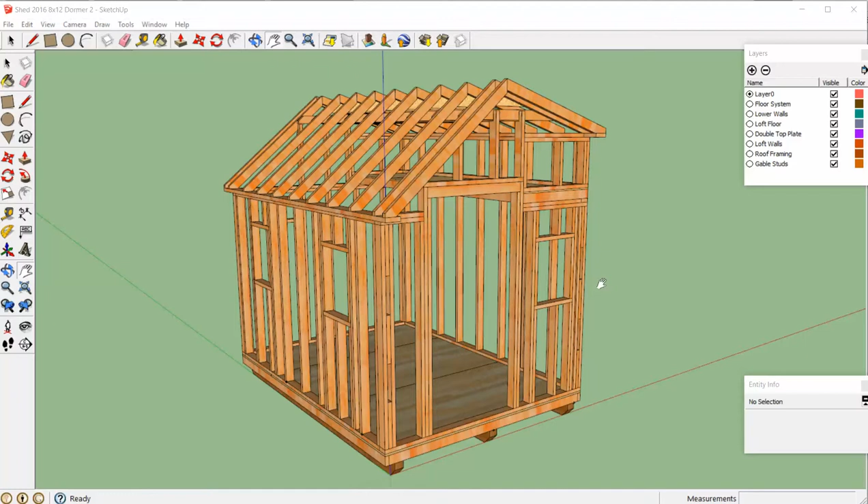Okay, we're going to start working on drawing our roof truss assemblies. I thought I'd give you a quick overview of what we're looking at. Essentially, we're looking to build a lot of identical assemblies. These are called trusses that we can begin to frame out our roof.

You can see how they sit onto the double top plate that you installed previously. And you can see now while we hang over 6 inches on the end, that gives us a nice little overhang on the front and back of our house.

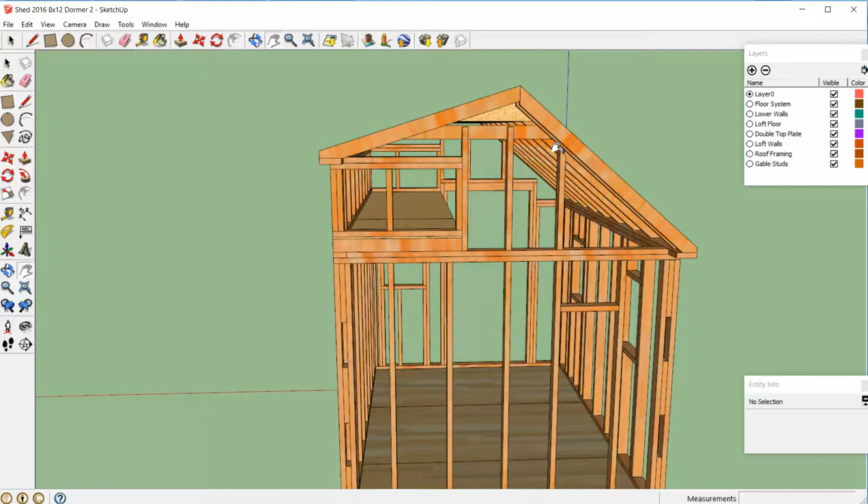The truss plan is drawn from the back so that we can see some of these truss pieces. Let's take a look at the pieces of trusses real quick, the names. The bottommost member is called the bottom chord. The angled rafter pieces, they'll call them top chords - I'll probably just call them long, short rafters. And then we're going to have some plates or gussets that help hold all the pieces together. So bottom chord, rafters, and gussets.

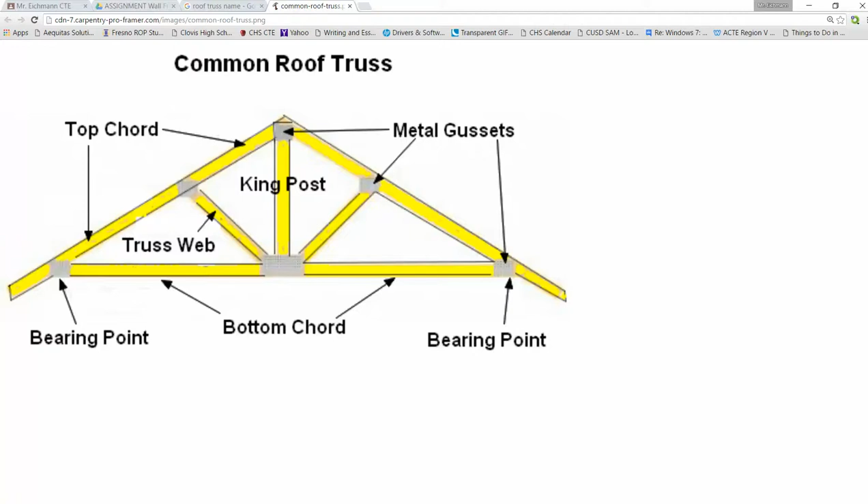Wanted to point out a few details on the truss assemblies you'll be building. They're almost all identical - almost all just like this one right here where we have the gusset, bottom chord, left, right, or short and long rafters. Those we have 1, 2, 3, 4, 5, 6, 7, 8 of those.

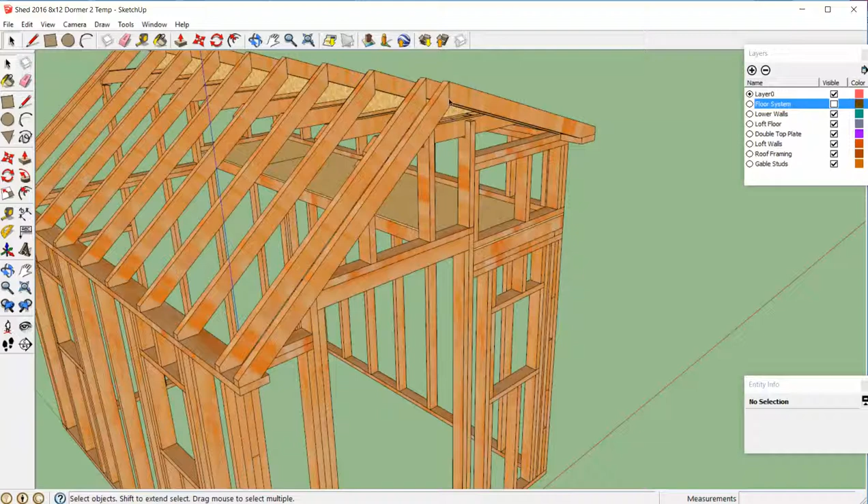We then have some very simplified stripped down versions out here on the ends that have no bottom chord and no gusset. These are called our fly rafters. And we have one final version - it's the only one like it in the whole building, and it has short rafter, long rafter, and just a bottom chord, but the bottom chord is on the opposite side, so that it doesn't interfere with the sheathing that will ultimately go on out here. So we have 3 different versions of this rafter, but they all use the same pieces.

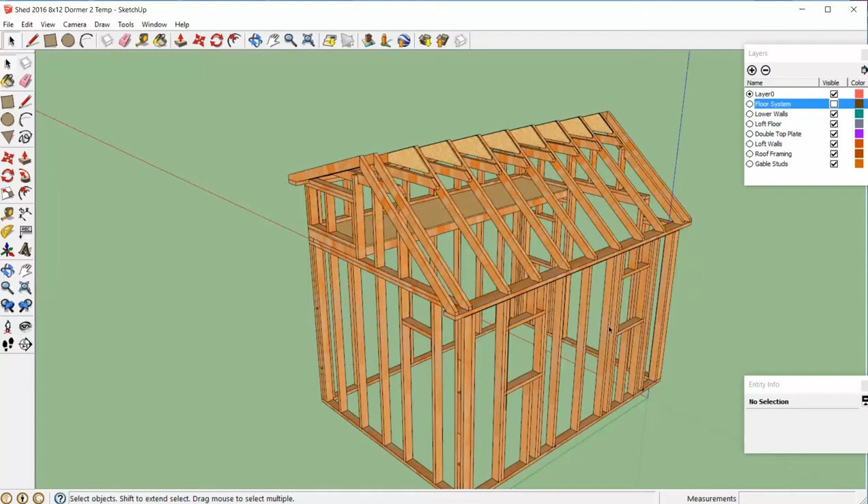So let's go ahead and get going on creating this. You should have your wall plan open that we created in the previous step with your loft walls. You should be right here at this step, in double top plate. Now we want to get up our building plans because what we're ultimately trying to do is recreate our truss just like this.

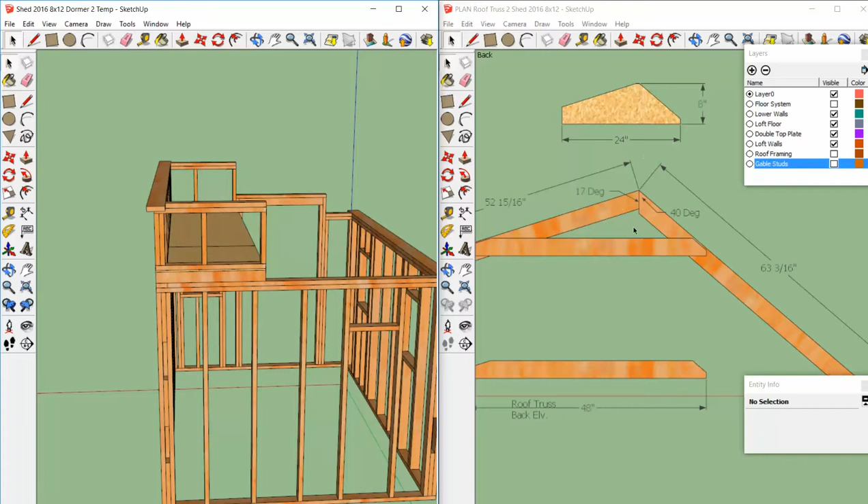Let me get the plans open. Okay, calling up the building plan. Why don't we get started? Why don't we start with this bottom chord? We won't worry about the angles - let's just worry about the overall 48-inch length of 2x4.

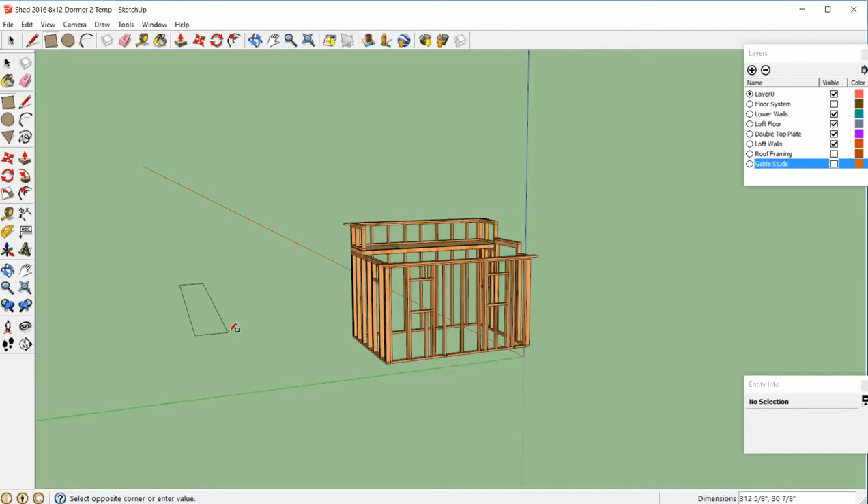So from our drawing, we want to create a 2x4, R for rectangle, on edge preferably. 1.5, comma 3.5. And we're going to pull that thing out 48 inches. There we go. Let's triple click in.

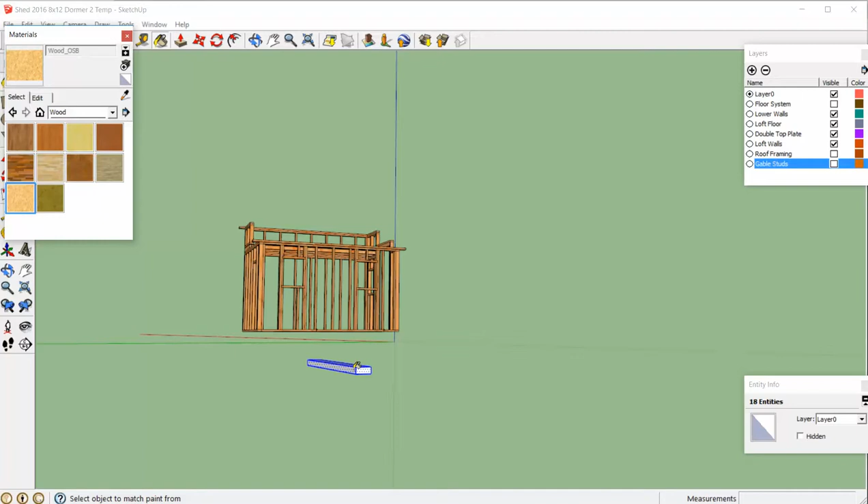And I'm going to brush, B for brush, and I'm going to give it a nice wood color. Material, wood, and here we go. Alright, and then I'm going to go ahead and make it - triple click in - make it a component. I'm going to call it bottom chord.

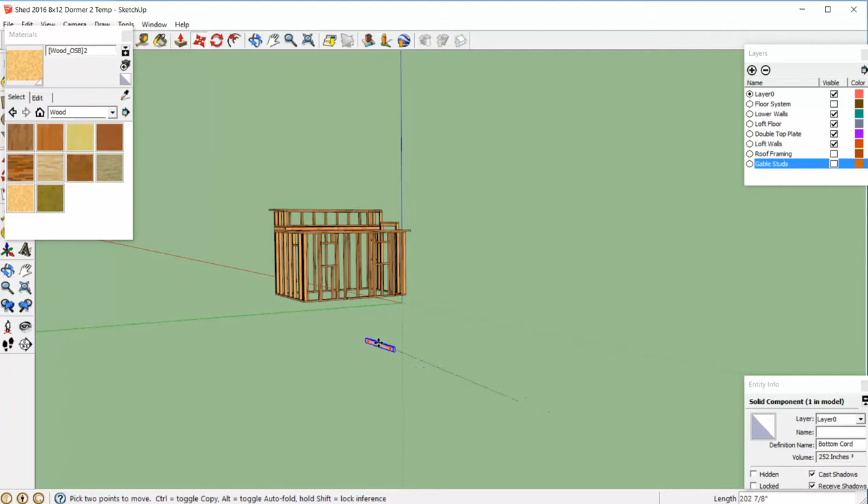Now I need to rotate that thing. Q for rotate, and let's get it up on edge. There we go. And let's move it over a little bit closer to our house. Here we go. Okay, we have our bottom chord now.

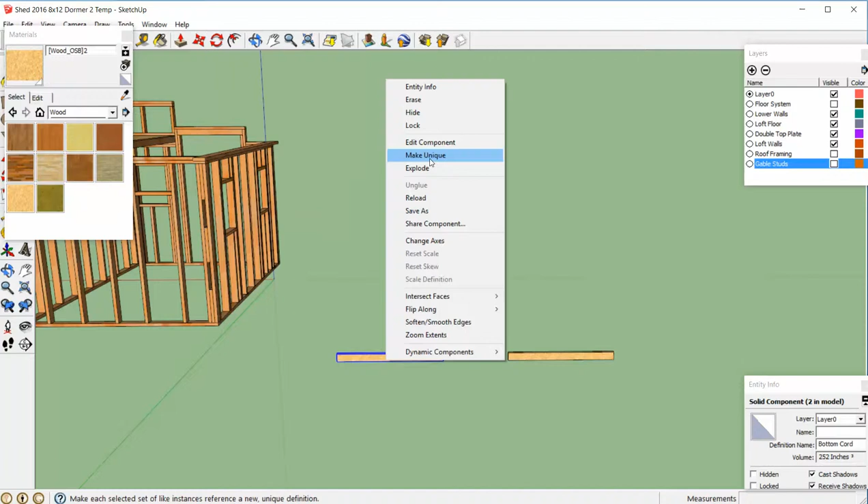Alright, back to the plan. On the plan, then we have a short rafter and a long rafter. Let's just get some wood to work with on that. Back to the drawing. I'm going to just duplicate this, M for move, press and release control, and I've made a copy. Now I'm going to make it unique, and I need to make it a little bit bigger. Push, pull.

I want to do the same thing for my other side. I'm just making some material here. M for move, press and release control to make a copy. I'm going to make it unique. And I'm going to push, pull, give me some more room to work with here. There we go. Let's go back to our plan now.

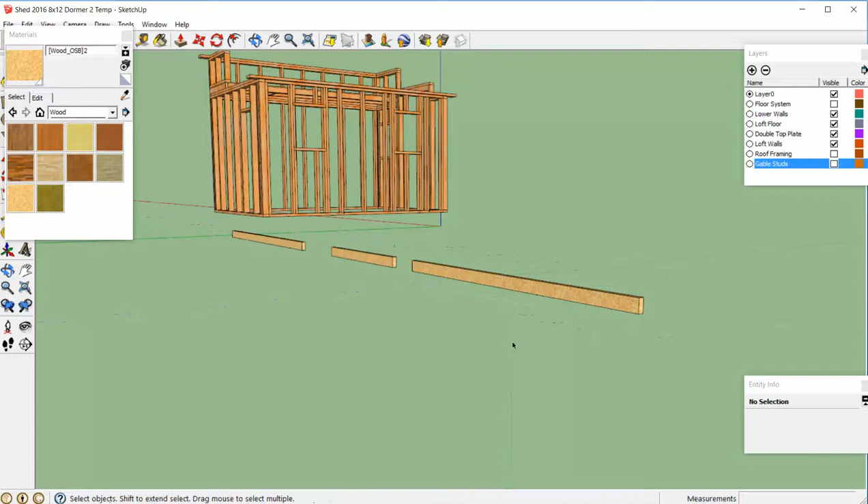Now on our plan, we see that these need to be cut at 17 degrees. On our plan, we can see that our long rafter has a 40-degree cut, and our short rafter has a 17-degree cut. We can also think of that as this is up 40 degrees from 0 and this is up 17. So let's go back to our drawing, and on the long rafter, let's select it.

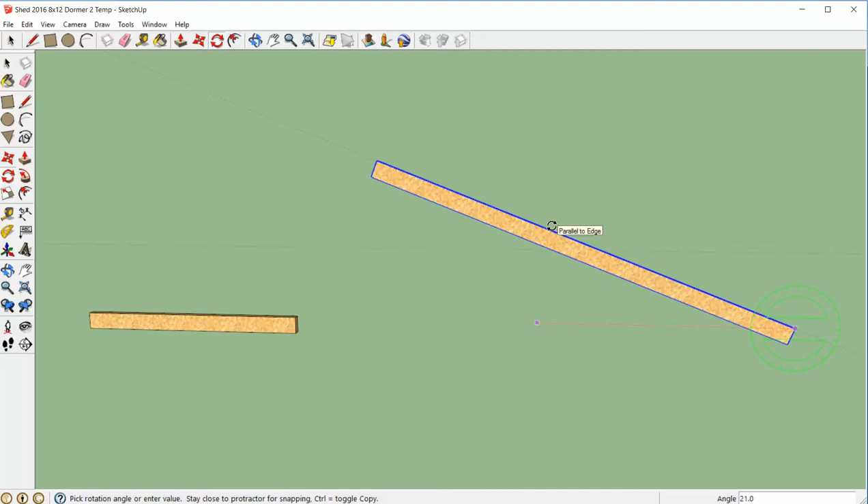Then let's press Q, which is rotate. Click on a corner, it has to be on a corner. Stretch out your rotation and click again. Now I can rotate this, and notice in the angle window down to the bottom right, I can actually specify an angle. I'm going to go with 40 on this one, 40 degrees.

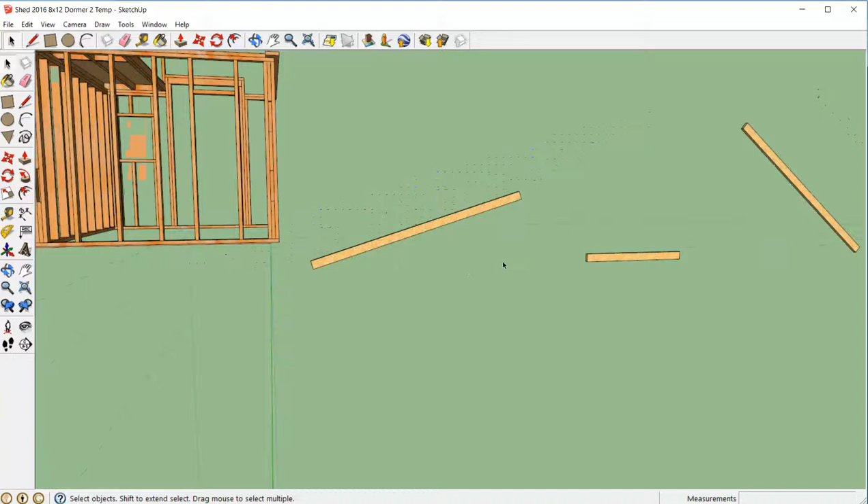And on this one, I'm going to grab the end. Q is the rotate tool, which is also over here in the toolbar. This is rotate, or protractor. Quick key for that is Q. And I'm going to bring it up 17 degrees. There we go. Now if I marry these two together, M for move, grab a corner, and let's put those together. There we go.

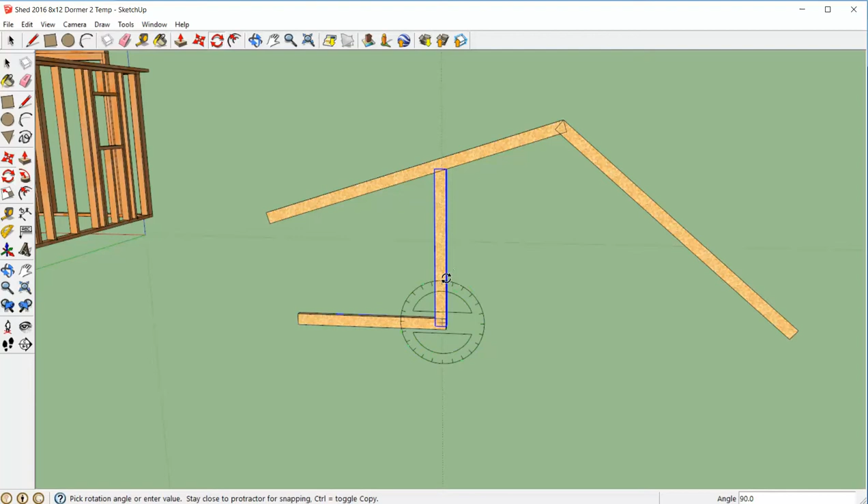We're going to start getting our angles chopped in. I'm going to go ahead and make a tool real quick for myself by selecting here, Q for rotate, and I'll make a copy of it. I need something that's straight up and down, that's all. M for move. There we go, I got something straight up and down.

Now I'm going to drill in, triple click in until I see the dots on the face of this board. I'm going to hit L for line, and I'm going to follow that down, straight down, and I'm going to push that away. Triple click in, and I'm going to push this excess away.

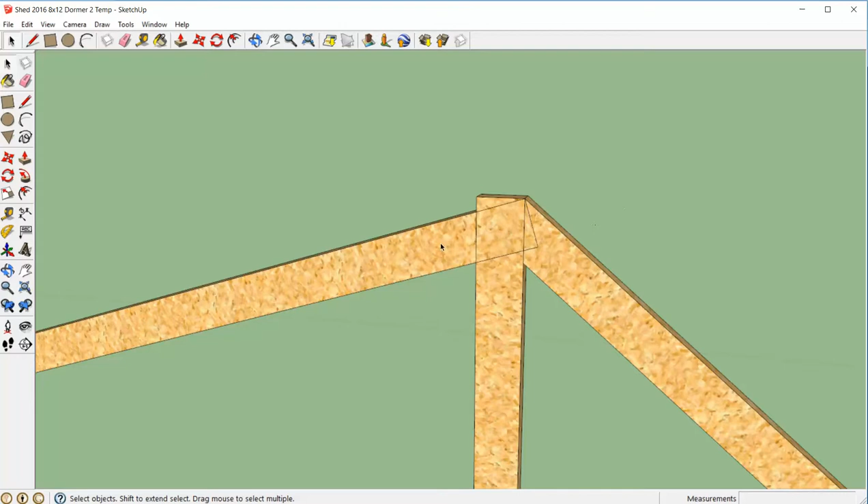Gone. Now I'm going to drill into this short rafter, left side. Triple click in until I see the dots. L for line, and take it to the bottom. And now I can P for push that excess away. Now when I take my tool out of there, my plumb tool, and I look at my rafters, I've made the end cuts that I needed.

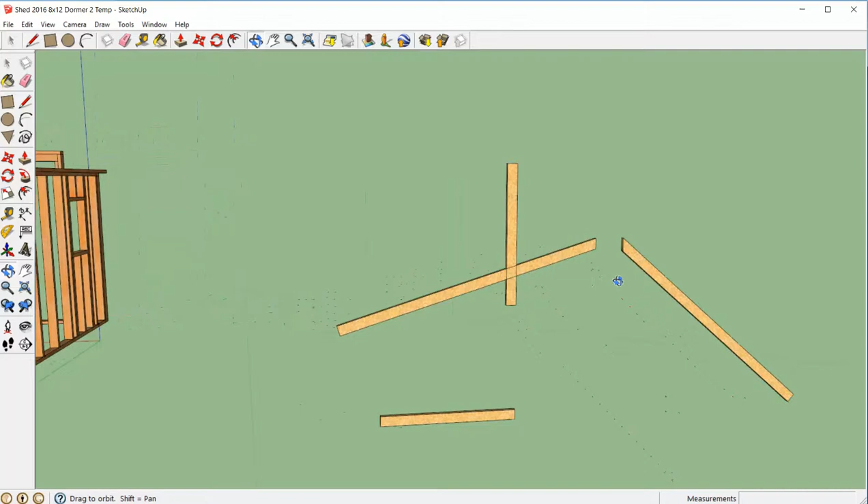Here we go. Let's put those back together. M for move. Excellent. Let's take a look back at our plans.

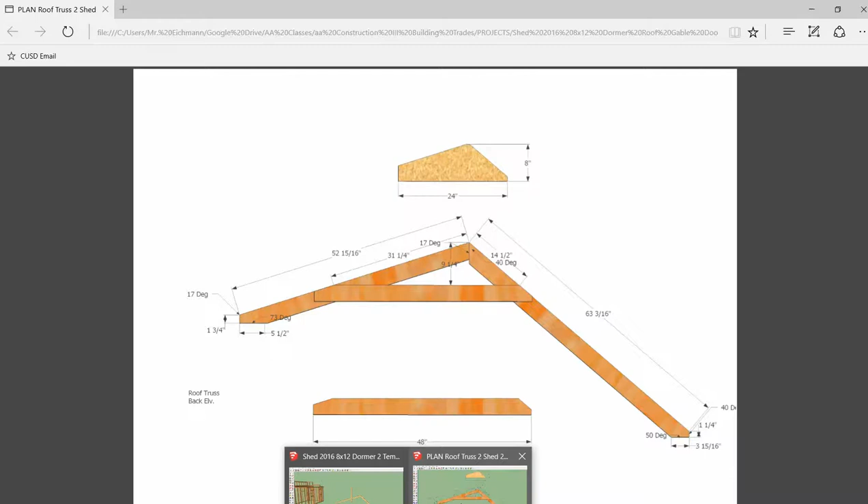Okay, I made a quick change here to the plan because we're going to need some more dimensions, specifically that this bottom chord is 9¼ inches down from the peak. So let's go ahead and place that now. Let me close this one. Alright, bottom chord 9¼ inches from the peak.

Take this, let's space bar, M for move, 9.25. Alright, now we just need to slide it into position, M for move, somewhere in here. Another dimension that we need from the plan is right here, 14.5 down onto this long truss, long rafter here. So let's mark that out.

T for tape. 14.5. There we go. Excellent. Very good. We can get rid of our little tool here. Actually, I think we'll want that for later.

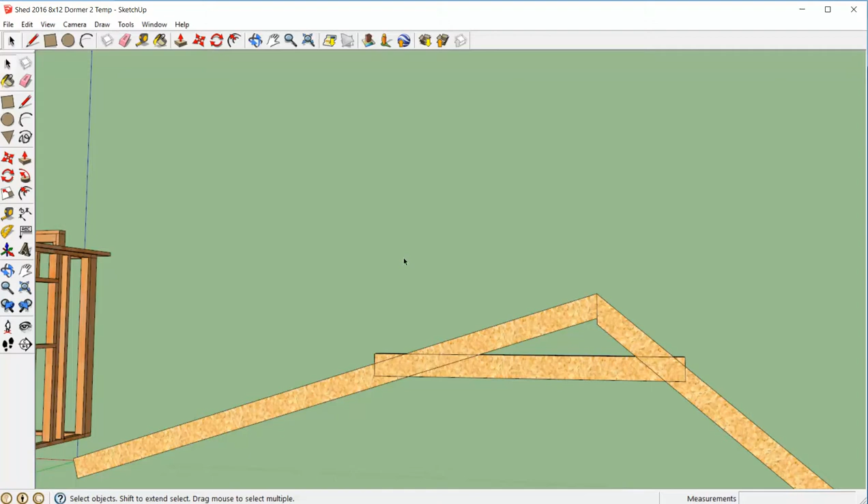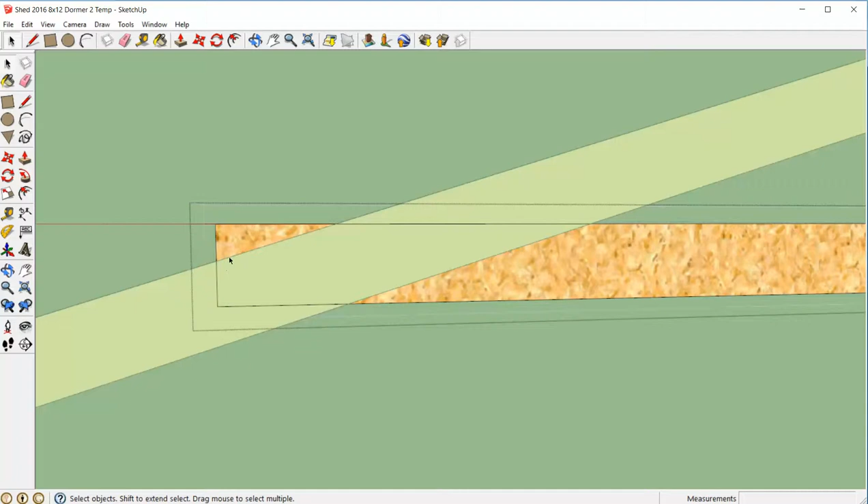M for move. Let's do some trimming on this bottom chord. Now I've got it into the rafters. We're going to move that out in just a bit, but let's trim it here now. L for line, and cut that away. Very good. Other side, L for line, and we'll cut that away. P for push, gone. Alright, now we have our bottom chord.

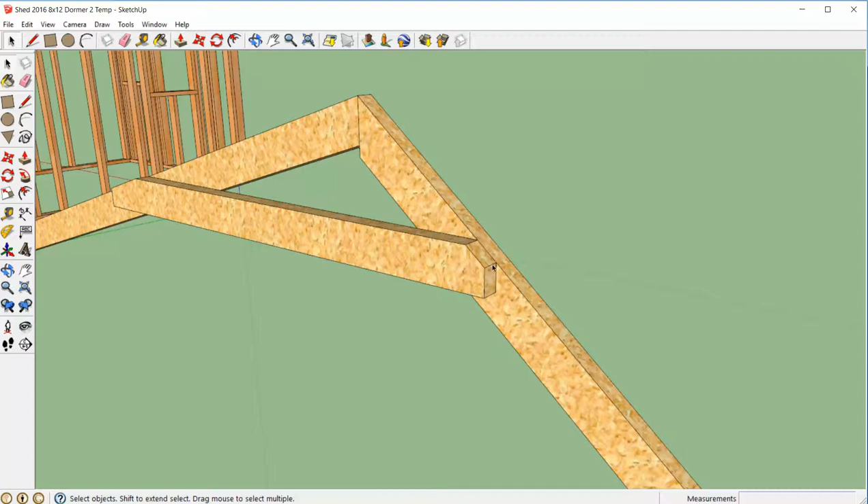Now there's something I want you to pay attention to here, especially when you're assembling it. Let's move this to the outside. There we go. You're going to be laying roof sheathing on top of this. We do not want our bottom chord to stick up above this rafter.

It would be such a bad thing, as a matter of fact, that we're going to go ahead and lower this down an additional 1/4 of an inch so that it's below the rafters. So all I'm going to do to pull that off, just click on it, M for move, start dragging it down, and type in 0.25. There we go. We're going to want that little bit of a gap right there as an insurance policy. Excellent, looking great. Now let's get the lengths of our rafters, then we need our gusset, and we're about done.

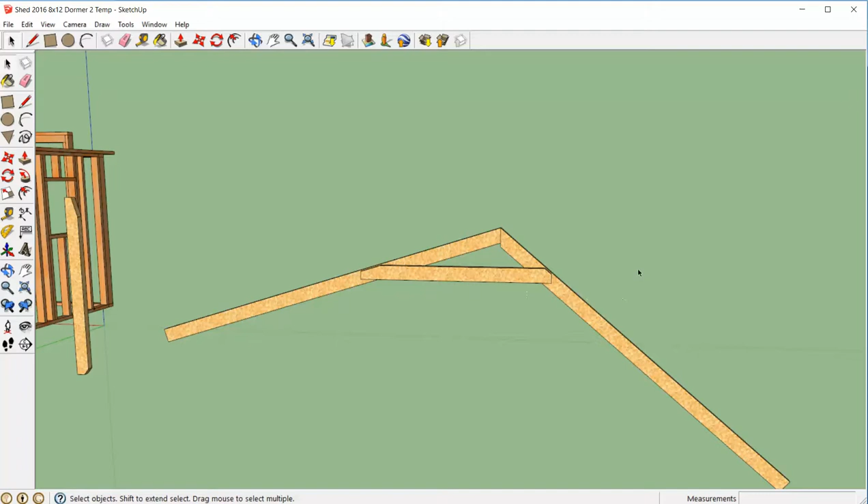All right, we get our blueprint back up, and we can see that our overall rafter length for the long rafter is 63 and 3/16. Let's go ahead and mark that out. T for tape from the peak, pulling down the edge.

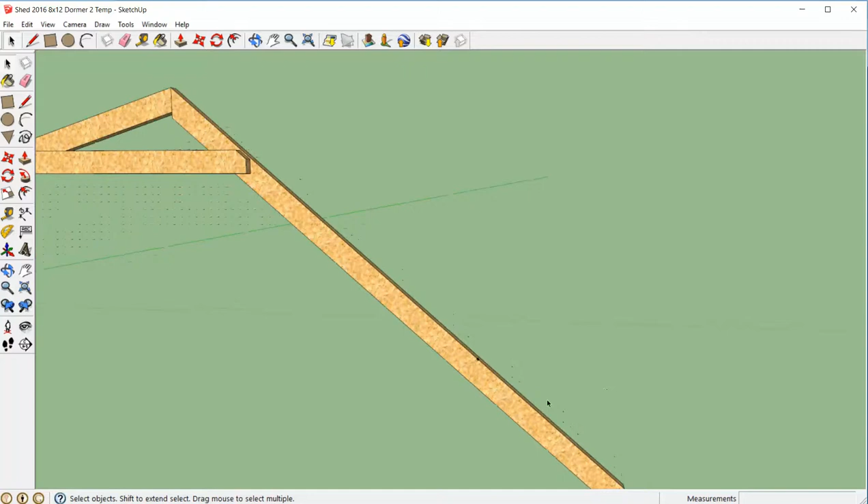63 space 3/16, enter, and it put a nice little T on there for us. But what do we do with that? Well, what we do is we can take our tool over here. Hey, look at that, because we did not make it unique, it's got the bottom chord stuff on it. I'm just going to line it up right there with my 63 and 3/16. I'm going to triple click in, L for line, and pull this down right there. There we go, and I'm going to push pull that away.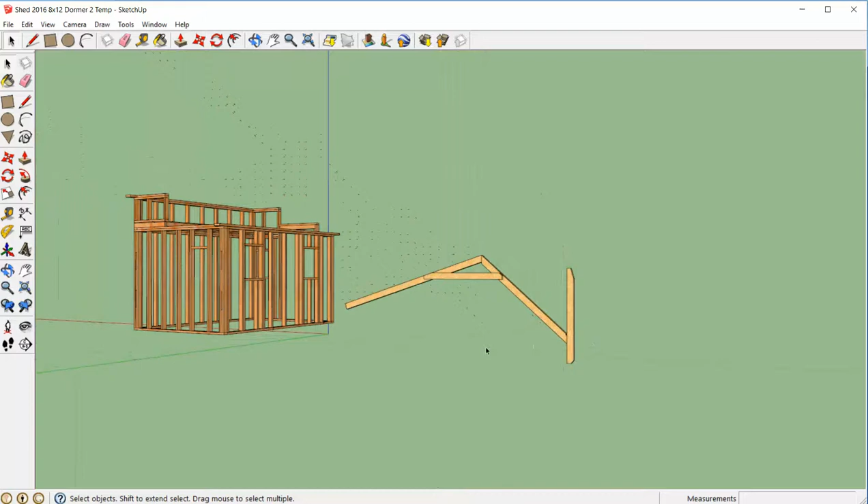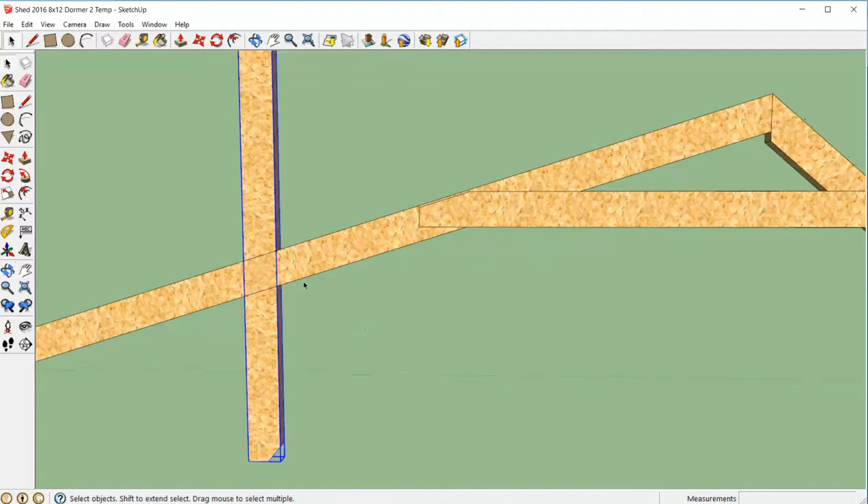Boom, love it. Alright, and we check the plan for the short rafter length. It's 52 and 15/16. T for tape, pulling it down. 52 space 15/16 inches assumed if you don't press anything. I'm going to bring my little tool over here now, grab the edge, lock it to the guide point, triple click in, L for line, down, triple click in, and push that part away. Got it, we're getting somewhere.

A little cleanup here, let's get rid of that guide point. There we go, it's good to clean up as you go. And we've got a guide point over here, let's get rid of that little guy. There we go.

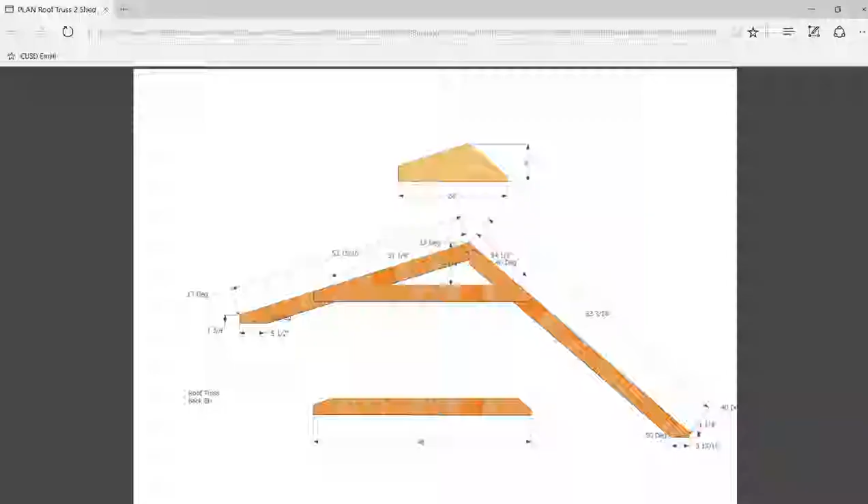Alright, what else do we have to do here? Well, we've got to get our seat cut. This is where it's going to actually sit on the double top plate, so we've got to cut in our seat cut right here. How can we figure that out? Well, let's go with this dimension, 1 3/4 on the short rafter down from the top. Let's go ahead and plug that in, 1 3/4. T for tape, pulling down 1.75. There we go. Now this, I should be able to just pull that all the way across.

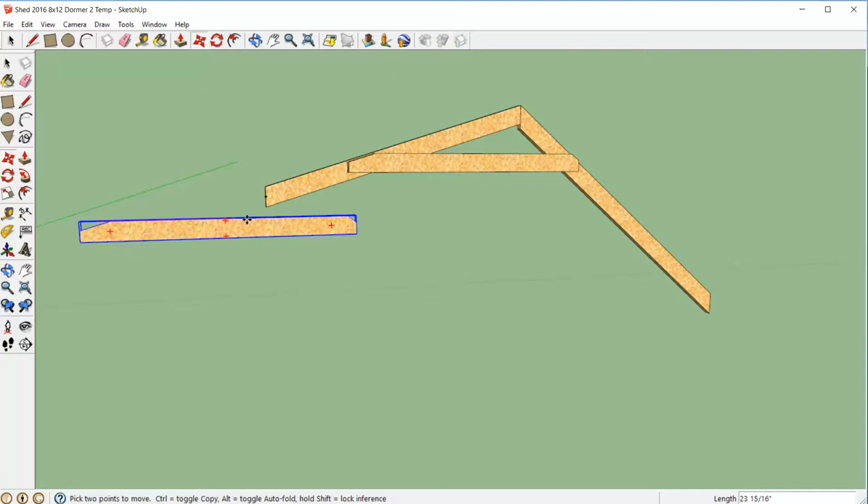Well, let's see here. I'm going to rotate this guy, Q for rotate, 90 degrees, bring him on over here. A little straight edge, snap it to the guide point, triple click in, L for line, and cut that cat off. P for push, push it away. Alright, let's get rid of that guide point that we made before.

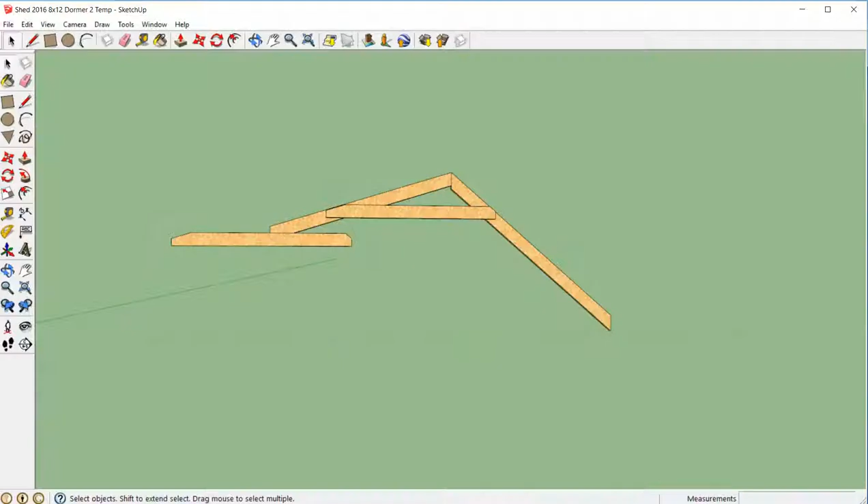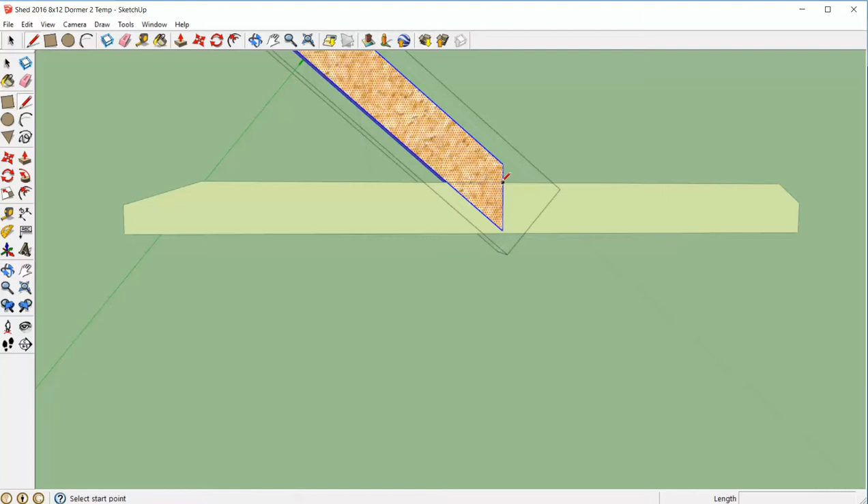Beautiful, let's check the plan. 1 1/4 for the face of this long rafter. Coming over here, T for tape, 1 1/4, 1.25. 1.25 inches is assumed. Bring my little tool down over here, line it up to the guide point. Triple click in, L for line, P for push pull, push it away. Delete the guide point. Excellent.

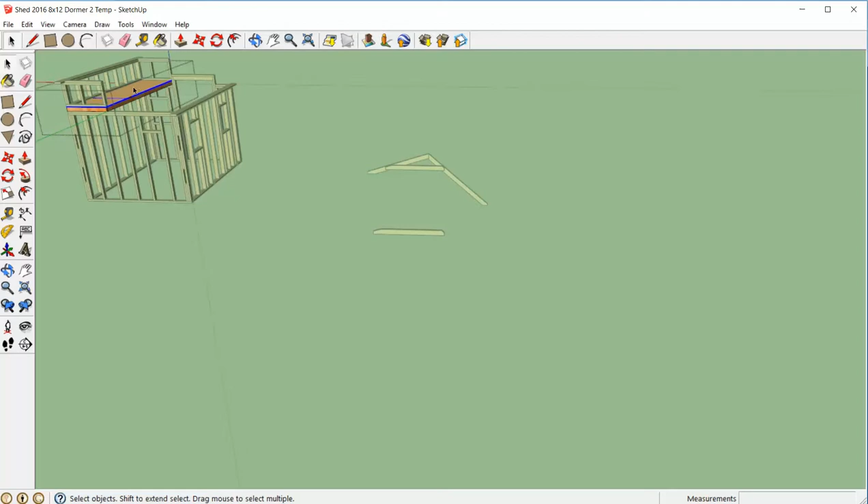You're looking good, you've actually got everything done on this now except for the gusset. Now for the gusset we're going to need some material. We can steal some over here from our shed floor. Control C, Control V. We're going to need, now be careful here, you're going to want to make it unique. Make unique, and let's put it to work.

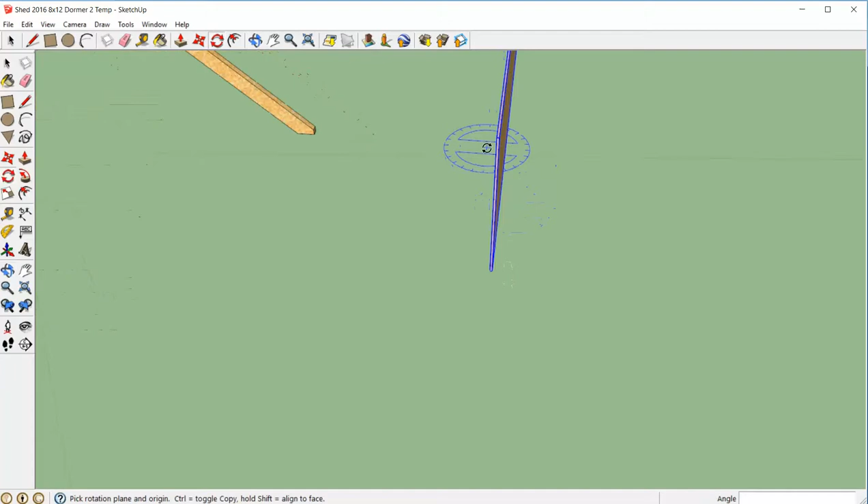Let's first get it into the right position. Q for rotate, up 90. Q for rotate, turn it 90. Now let's get rid of some of these pieces here. We need it, according to the plan, 8 inches tall and 24 inches long. Well, let's do that.

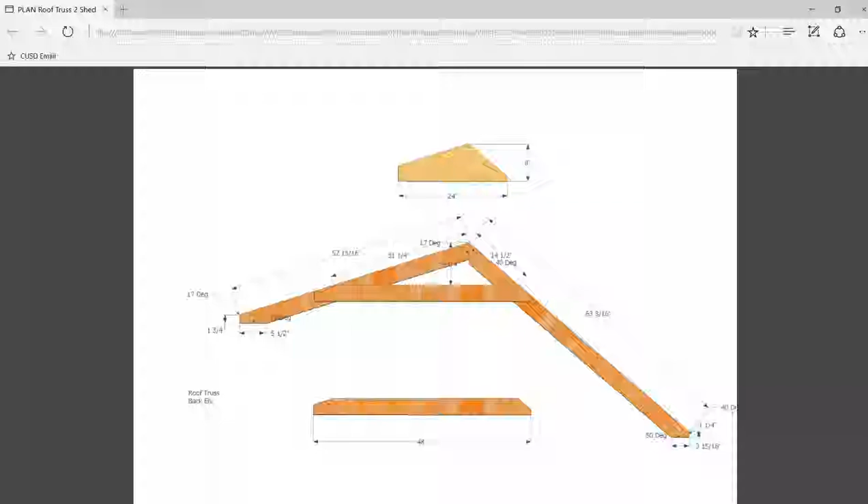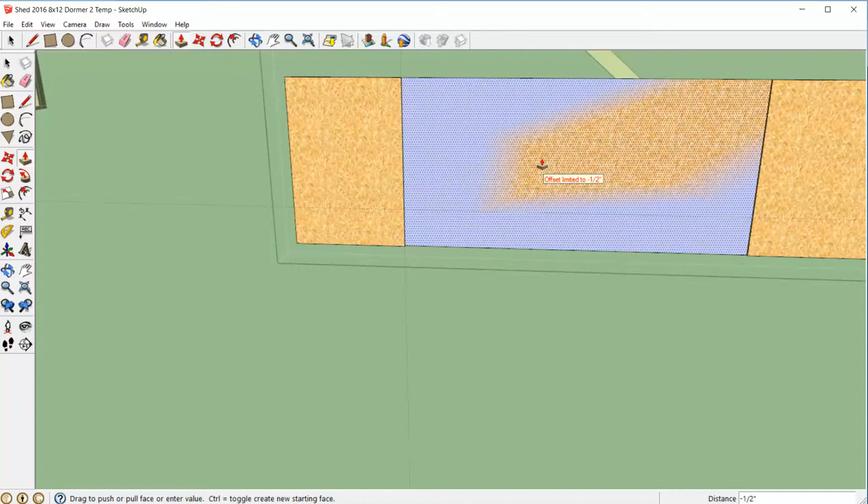T for tape, 8 inches, and T for tape, 24. All right, let's draw some lines in here. L for line. Let's get rid of that. P for push-pull. Oh, stop it. And L for line. All right, you want to play tough guy, huh? I'm just going to delete it then.

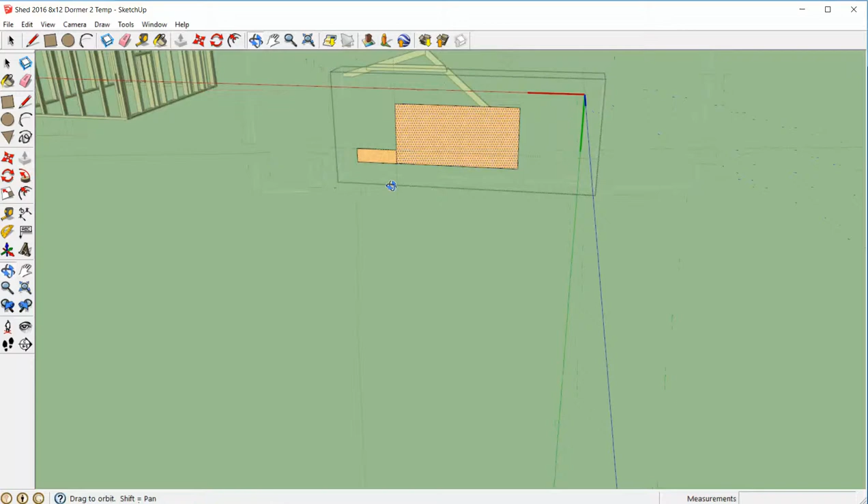I think that worked. There's something way out there yet, though. Well, here nor there, let's get it up there and do some trimming on it.

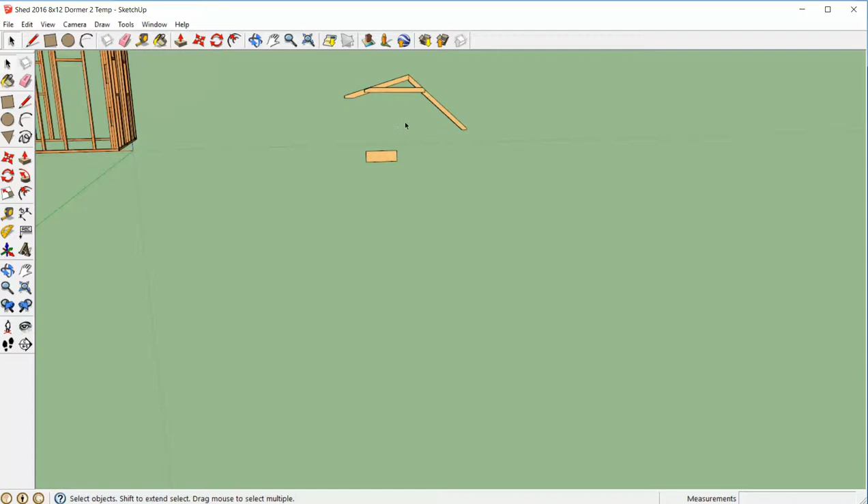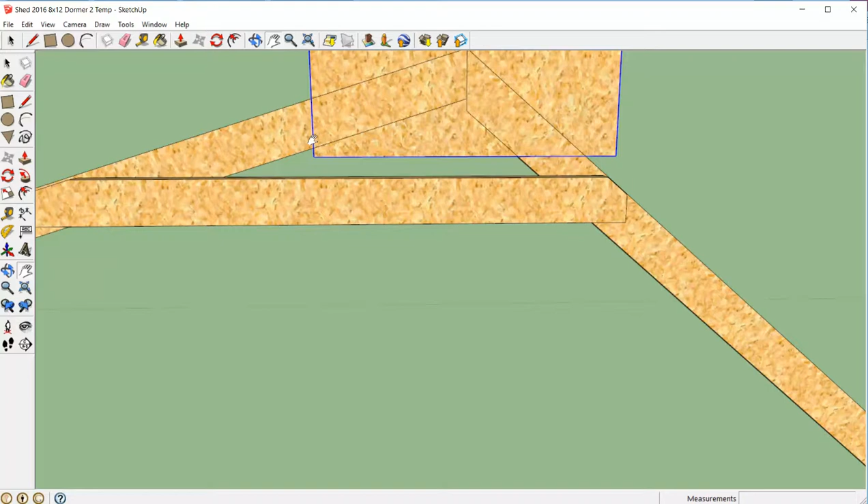M for move. I want to find the center of this thing, the midpoint, and take it to the midpoint up here. Let's see what my plans look like. I'm not sure if it's at the midpoint, almost looks like it's off midpoint. We want to try and get as much of that material holding our truss together as possible. It is a structural item, but we don't want this bottom hanging off like that over there.

So let's do this. I want to move this thing a little bit over, just trying to find a happy spot here. Hey, look at that, oh I like that. All right, so I've just slid it over so that my corner lined up down there. Now I'm going to cut the top.

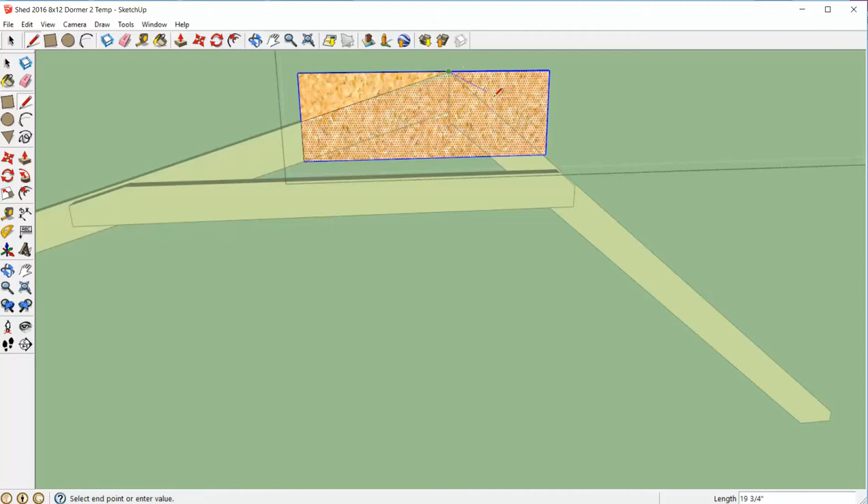L for line. Here we go. And L for line. Here we go. Now I want to push those away. Push that away. There we go.

I want to brush this thing a slightly different color. B for brush, let's make it this. There we go, so it stands out a little bit. All right, now I'm going to move that guy out.

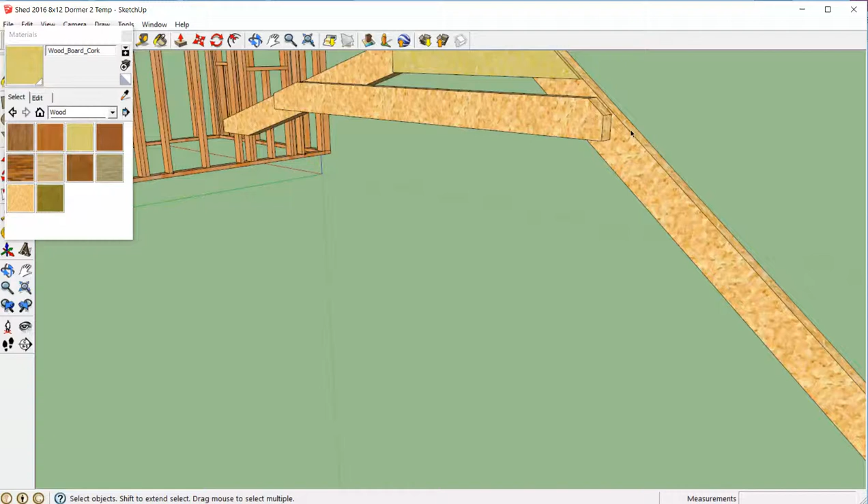Same thing as the assembly of our bottom chord, we want to move that thing down a quarter inch so it doesn't interfere with the roof line later on. Down 0.25. There we go, we have our first truss made.

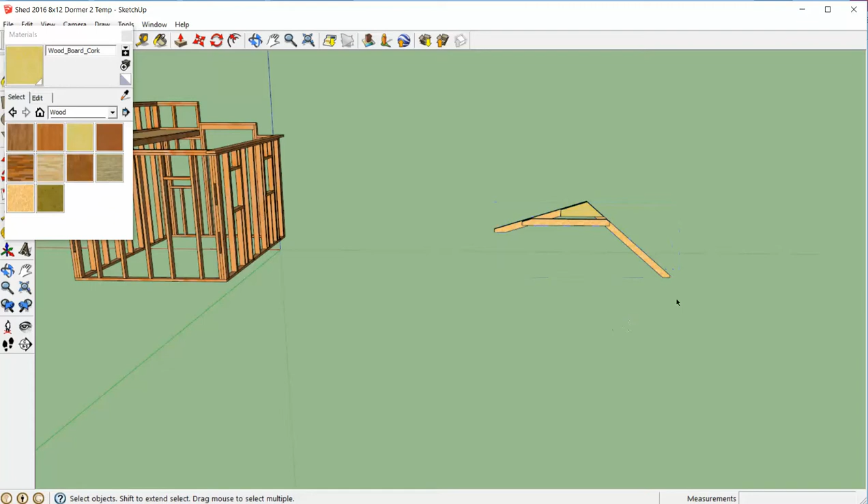I'm going to go ahead and highlight the whole thing, make it a group, and I'm going to highlight the whole thing and also make it a component. Excellent. Now let's start putting them into place on our drawing, on our model.

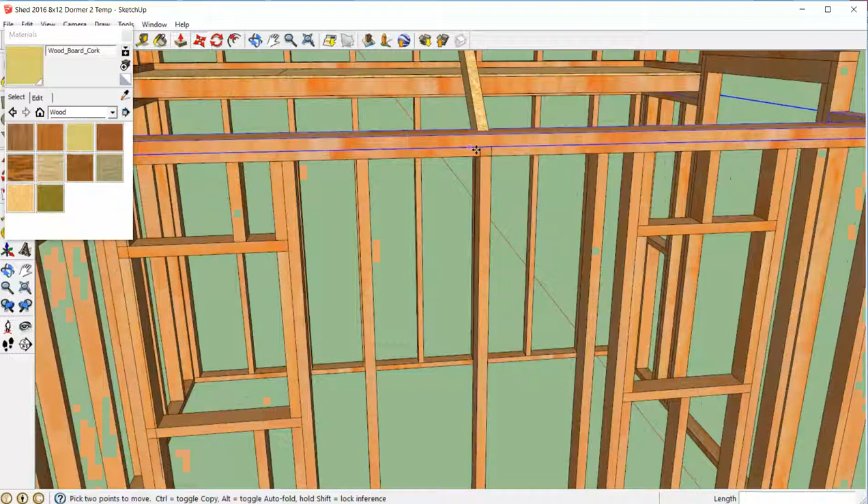M for move, grab the corner, and I'm just going to set one right above this stud. Now they're going to go above all the studs, 16 inch on center. I went with this one here because it's an easy... oh, don't move the wall. Now I just need to move it up to the double top plate.

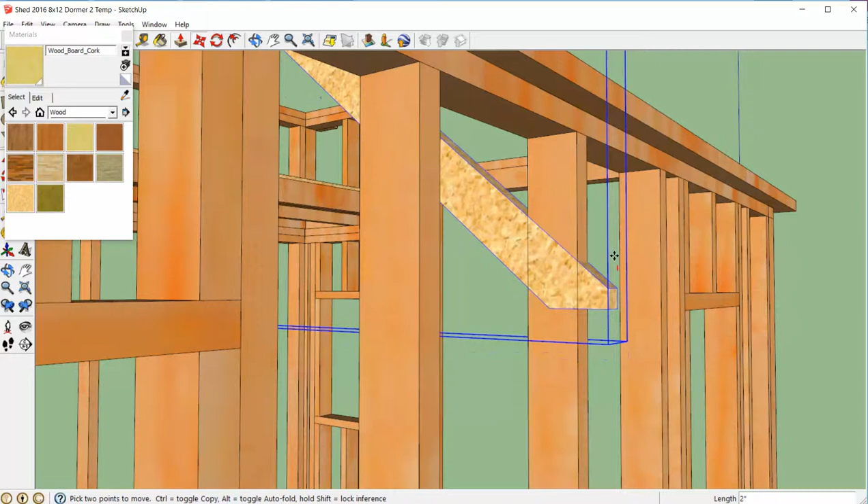I think I went off stud there though. There we go, I need to move it out 2 inches. And now I can move it up to the top of my double top plate. There we go, so I got it in place now.

It should go from wall to wall. Oh, a little bit of a design issue here. Oh, look at that, it's like my angles are off or something. We're going to go with that though.

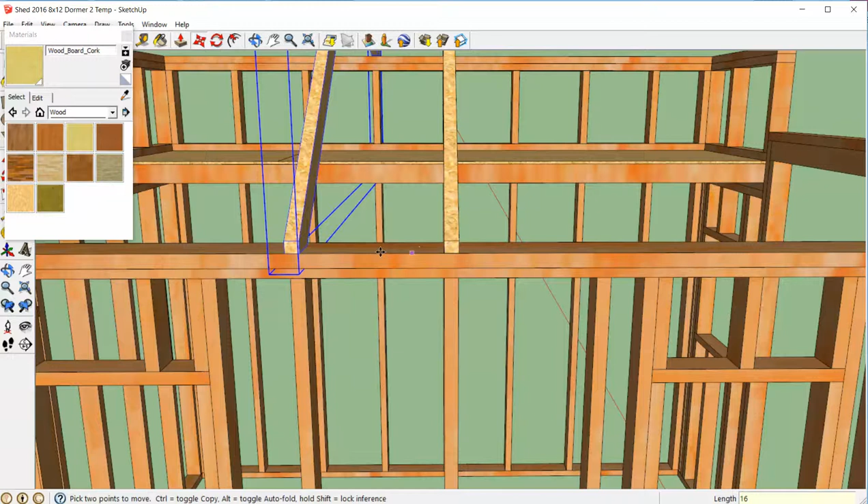Alright, now I can just repeat those, moving it down, grabbing here, press and release control, 1, 6, enter. Grab on here, press and release control, 1, 6, enter. Grab on here, press and release control, 1, 6, enter. That's about all I can do over there.

Let's go the front direction, M for move, press and release control, 1, 6, enter. Press and release control, 1, 6, enter. Press and release control, 1, 6, enter.

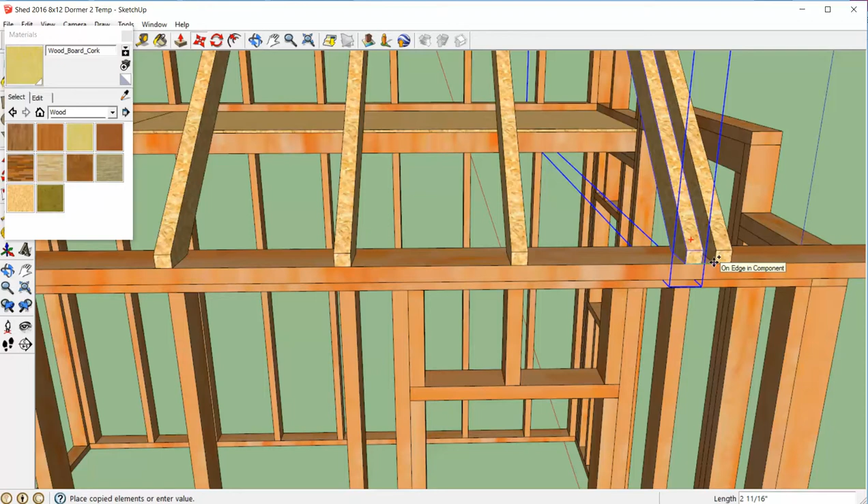Press and release control. And this one's going to go right to the edge of our house in the front here, and then I've got to slide it out. There we go. And we can do the same back here.

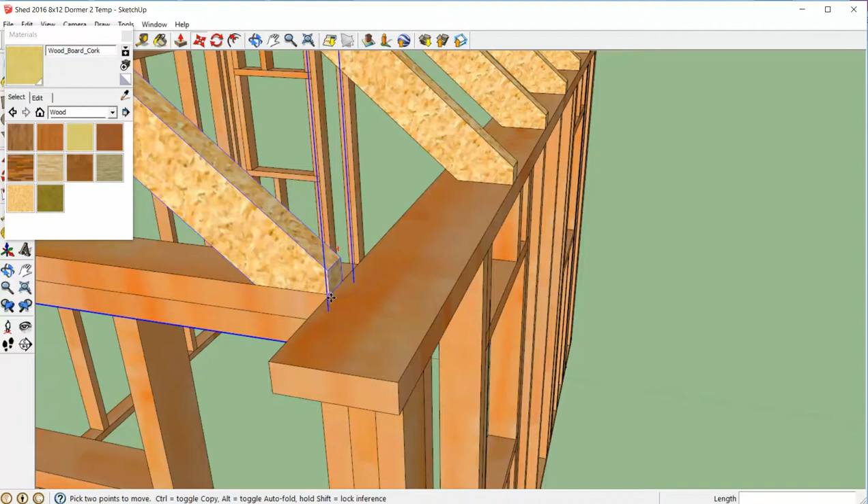M for move, press and release control. I'm going to take it right to this edge, and then I'm going to slide it out, keep it on the axis. Oh, I added one, shouldn't have did that. Alright, and then let's take one out to the end back here. M for move.

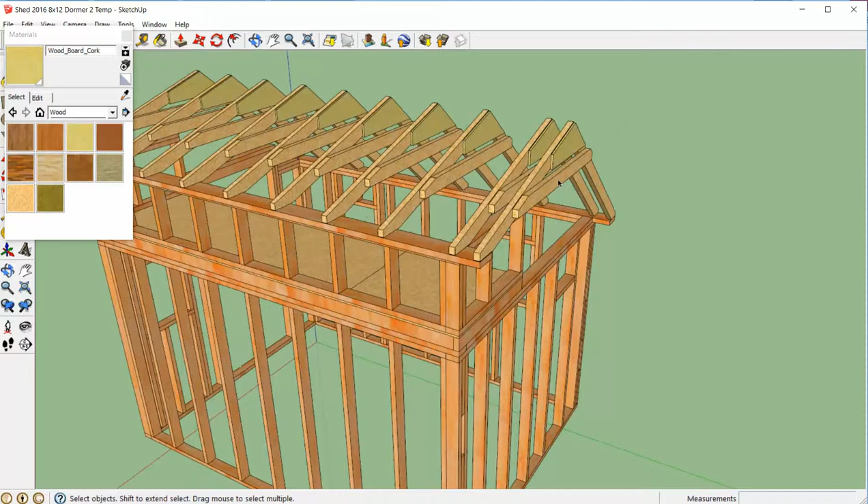Okay, but we have some things we have to fix here because we don't want to have all these chords and gussets hanging out here in the end. So I need to make this unique. Make unique. Now within that assembly I need to delete that and delete that. There we go, now I have my own assembly.

I want to move this one to the front. M for move, press and release control. Let's take it out here for our fly rafter. There we go.

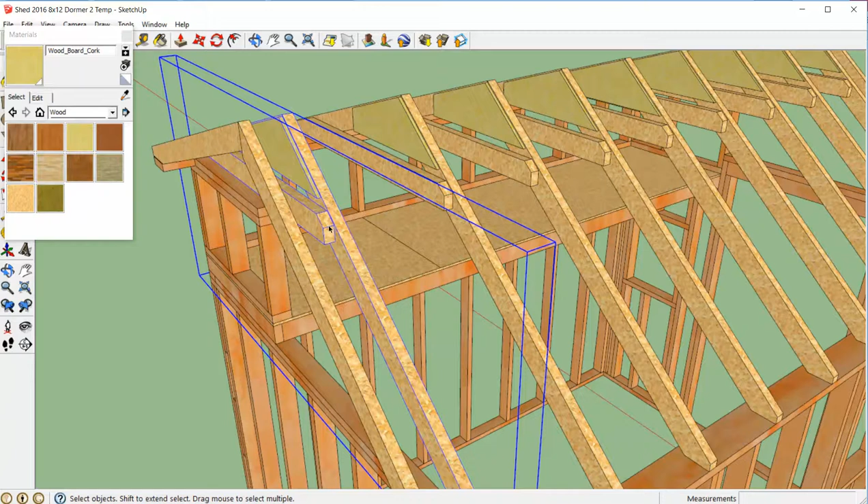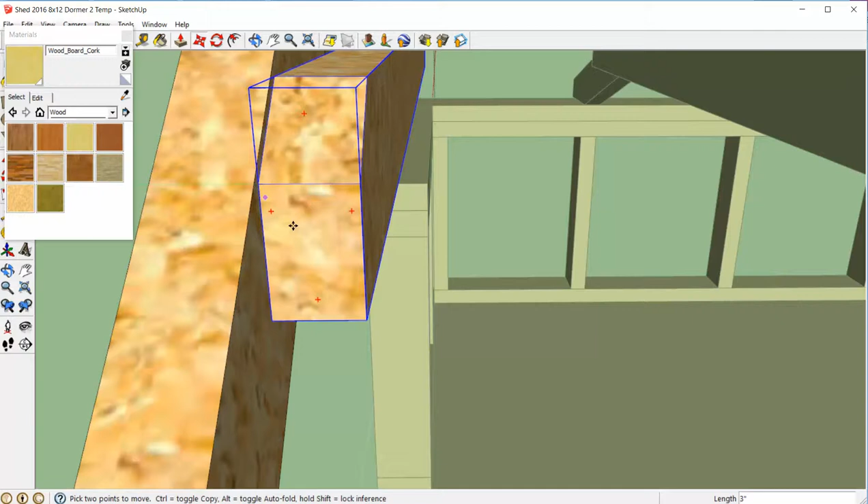Excellent, and last thing we need to do here on this second one, we need to make it unique, and we can get rid of the gusset altogether on this one because it's going to have sheathing all the way up. M for move, we're going to move this little darling to the total opposite side.

And that should be it. We have all of our trusses made and they are in place. Great job.